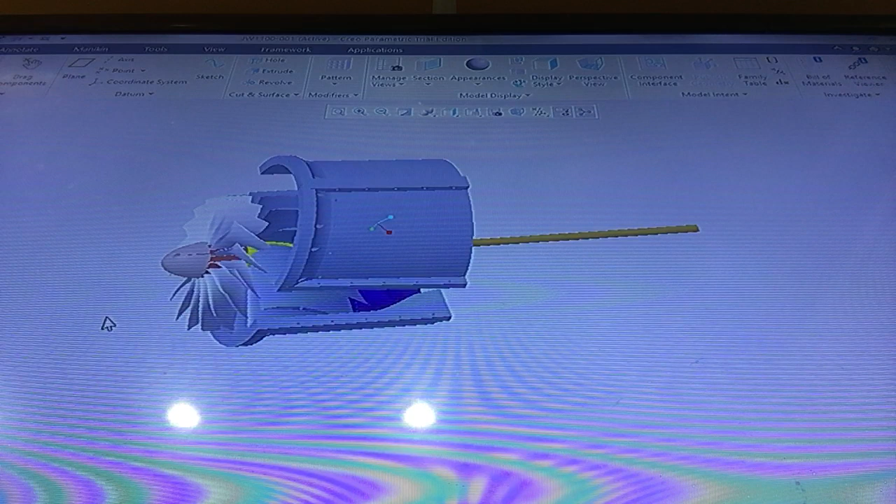The quality of the video is not going to be better, but I'll try to get a camera. I haven't found the one yet, but I will get it.

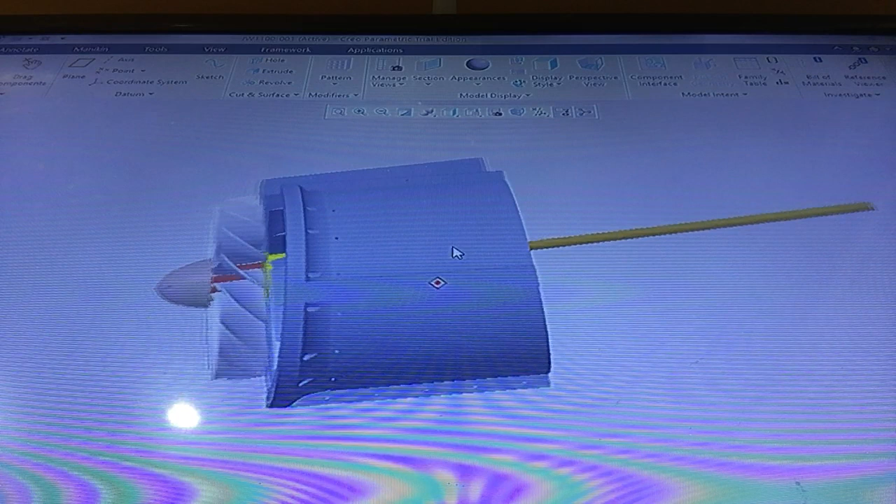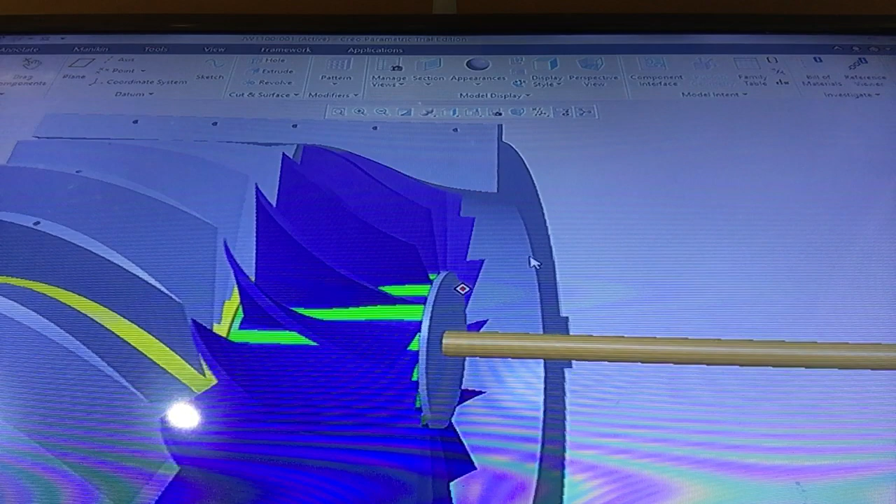Thank you. So far from the last video, I've added some features and parts. This outer shell, let's get rid of it. Okay. So I've added a stator blade and a secondary compressor blade. What I'm trying to achieve here is to create a venturi to make air velocity faster and slightly compress the air.

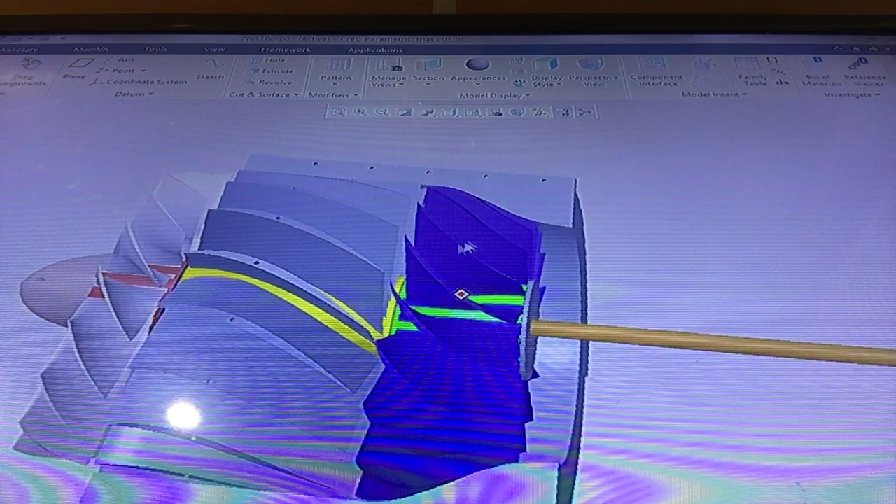But then these stator blades, I could not do it in one piece because my printer capacity is 9 inch, but this is more like 12 inch. So I had to create individual blades, which is the only choice I have, as well as this outer shell. I had to make it 4 different shells to make it fit in my printer.

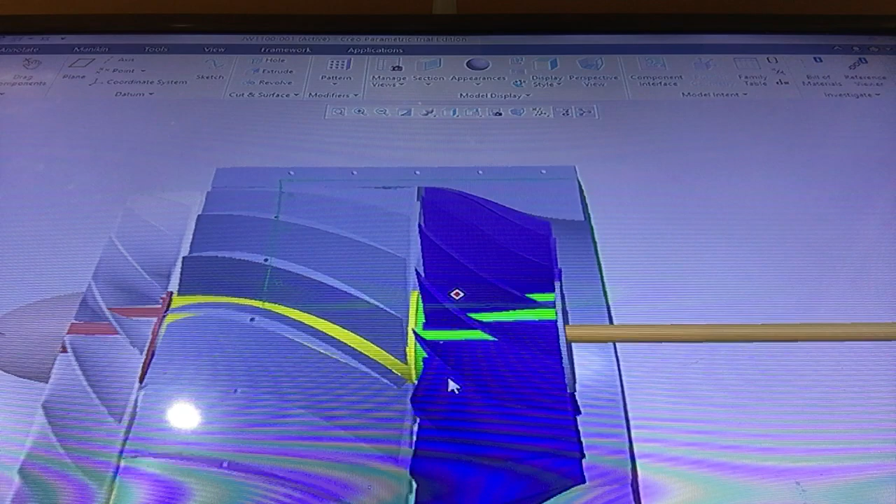So the stator will change the direction of the airflow, and then it'll be received by a secondary compressor blade, trying to see what it does. And I also added a bearing inside. I'm not sure if I can show you. Maybe I can.

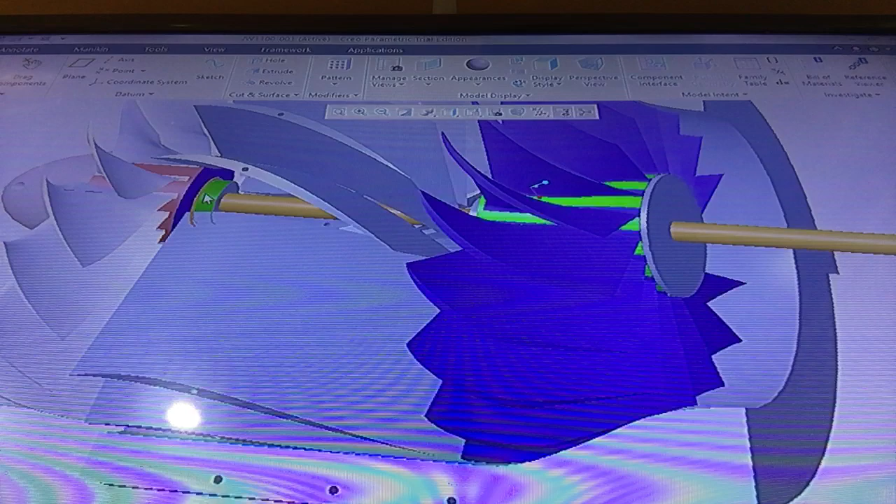Alright, there's a bearing, also a thrust bearing. I've already ordered from Amazon. It didn't cost much. It's already delivered here. I can show you in a minute. So the standard shaft is 1/2 inch, so the bearing ID will be 1/2 inch.

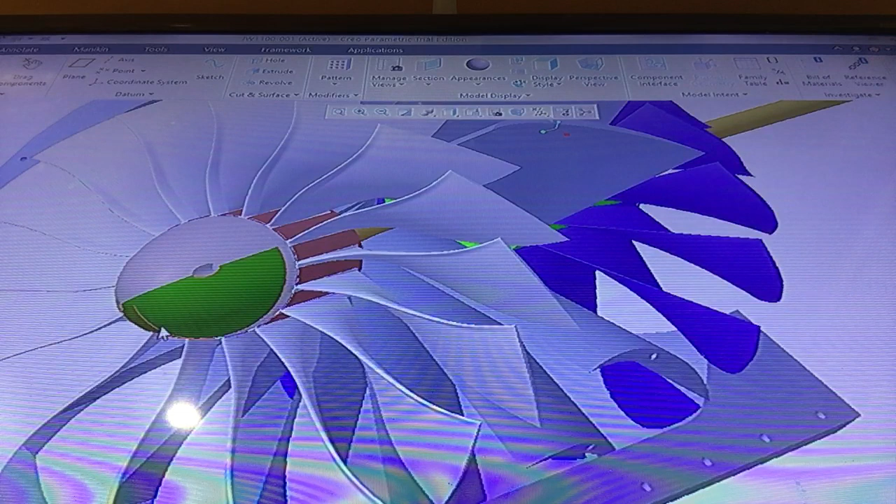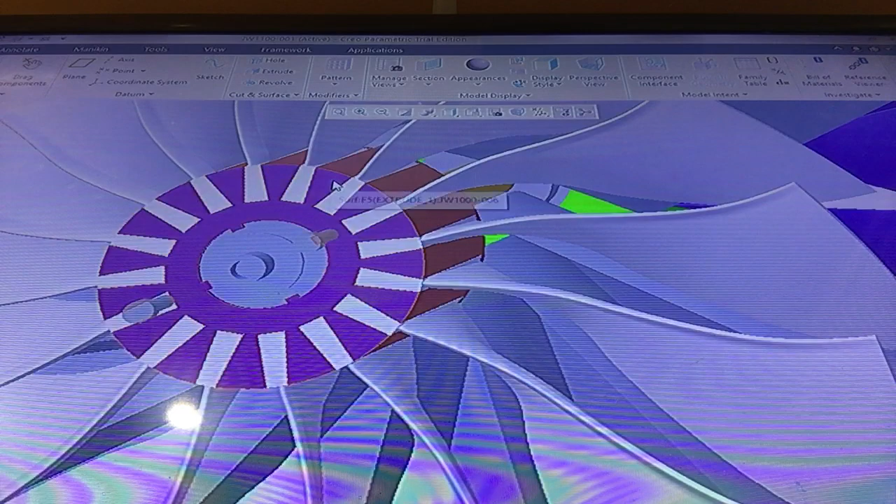So also thanks for the comment on the dovetail design. I actually like those comments because the comment might be written by somebody who has more experience in design than me, so I really appreciate it. At this point, I'm just gonna try this even if it breaks, because I already printed it, I'm a little bit lazy, but yeah, I will just try it and see what it does.

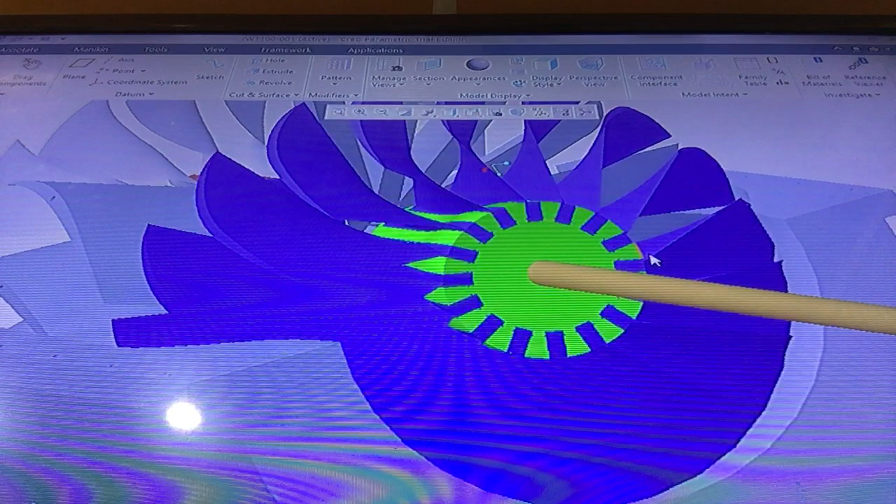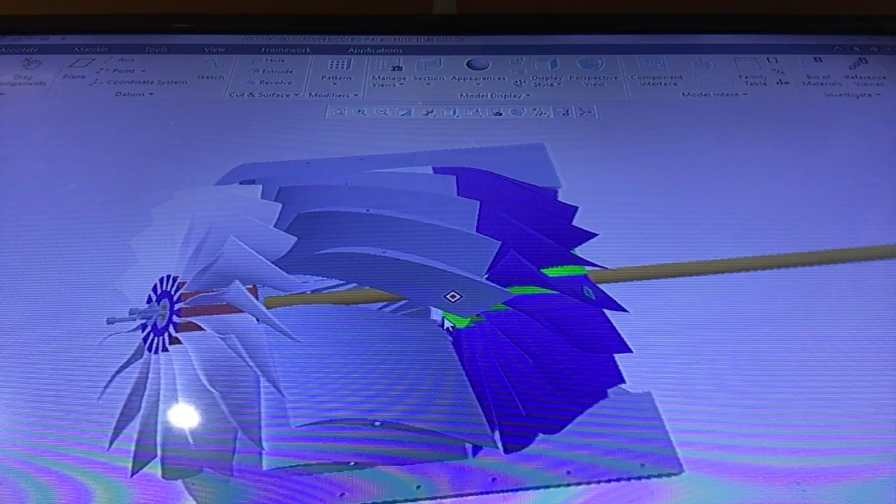But then this back fan blade, I slightly changed the concept of it. I made a rectangle and then added a tooth in there and also try to see what it does. This is so far what I got on the model side. On the hardware side, I haven't got much other than adding some bearings, but the next thing I'm going to do is print all these individual parts and assemble it and try to come back to you guys.

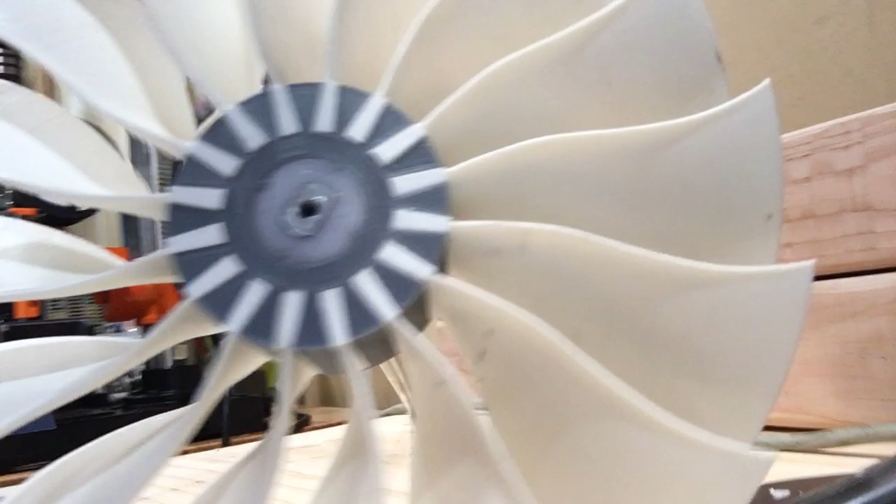So the hardware side, I don't think I showed you last time because this cover was on, but then I took this cover off, and it's a little bit big. That's fine. So the center is an aluminum shaft. I milled on both sides and drilled and tapped on the center, and all this center core will be a printed part with PETG material, pretty sturdy, and the gray part is PLA.

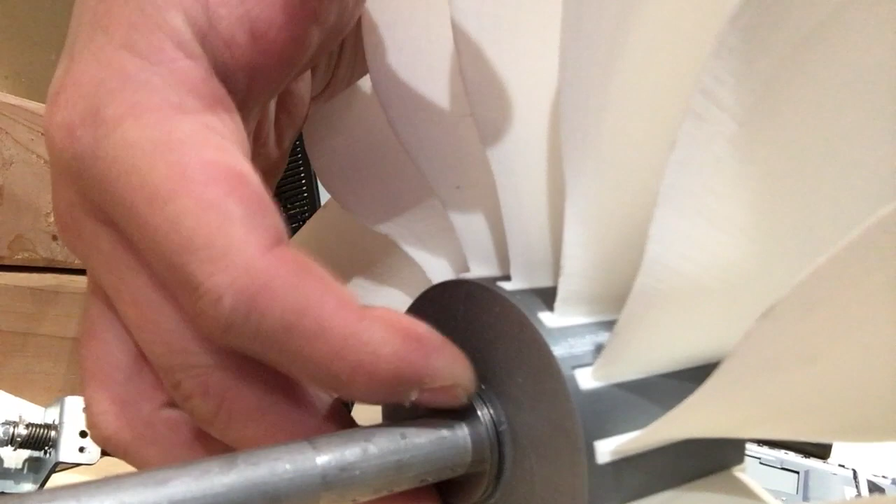Not sure I mentioned these blades. These blades are printed in ABS. It's got some flex to it, and also the bearings. I got them from Amazon, and also there's a thrust bearing, which is for the pressure of tightening all together.

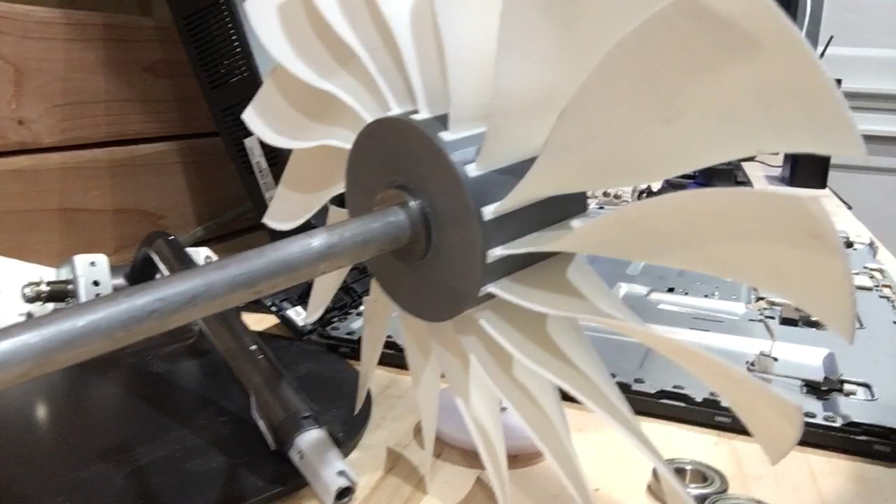Yeah, so I'll print the rest of the parts and then come back to you guys. Not much to change on hardware, but that's it for today.